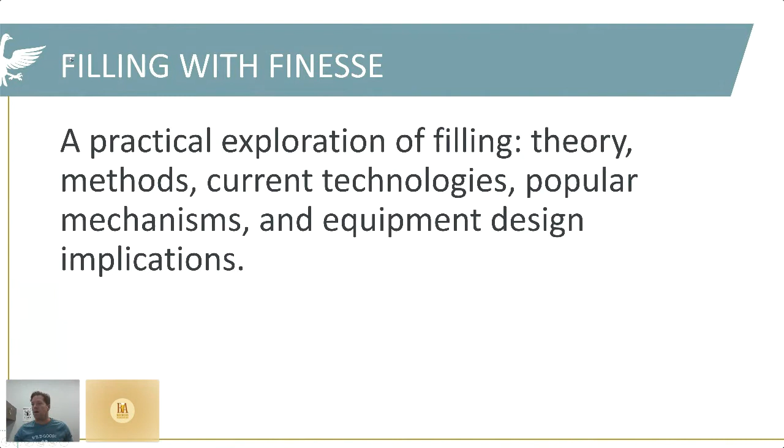So, without further ado, let's talk about this. We're calling this Filling with Finesse, a practical exploration of filling theory, methods, current technologies, popular mechanisms, and equipment design implications. Sorry, I got to move my monitor here. There we go. Now I can read what I wrote. Here's a quick overview of some of the stuff that we're going to talk about. There's some introduction, so who I am, mostly what the background is.

We're going to have to talk about some science and, hopefully, some fluid dynamics and stuff like that to really get the fundamentals down so we can understand why these things work. I'll go into some definitions of what this technology is, so when we're talking about it, or when you're talking about it in the future, we can all be on the same page and using the same words. And we will talk about some of the fill methodologies and some of the technology that's out there, what it means, how it works, and the pluses and minuses of what's there.

There are things that we're not going to cover. The first one is going to be DO and O2 pickup. Okay, I'll talk about it a little bit right now, but everybody says their filler is the best for DO pickup. This one's better than that one. And hopefully by the end of this you'll see that really it's not the mechanism, it's really how you're using it. And you can get great DO or terrible DO with any fill mechanism on the market.

Other things we will not talk about are politics, COVID, definitely not religion. Well, actually, there's a lot of things we're not going to talk about, obviously.

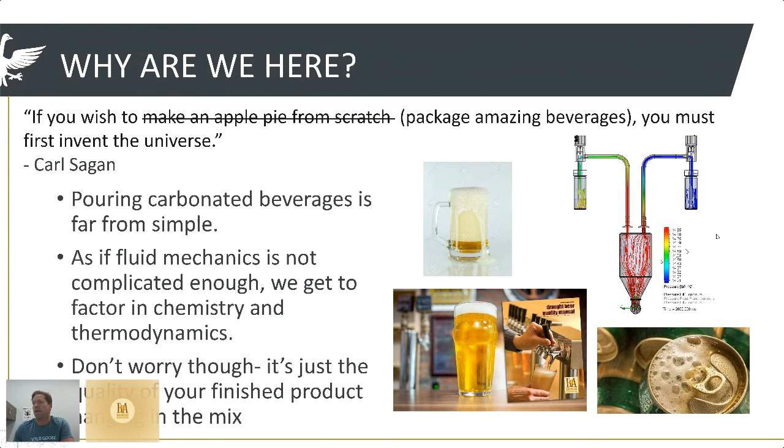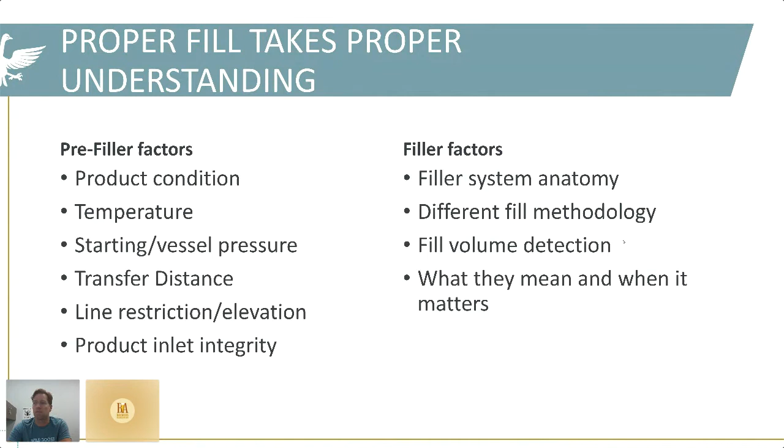And then there's the specific filler aspect of it, what does your fill system look like if you're evaluating different ones. We'll go into the anatomy of each of those and the different technology of how they work, how they fill, how they detect, and then why it really matters. So hopefully we'll be able to shed light on this and make what is a very complicated thing appear a little simpler by the end of it.

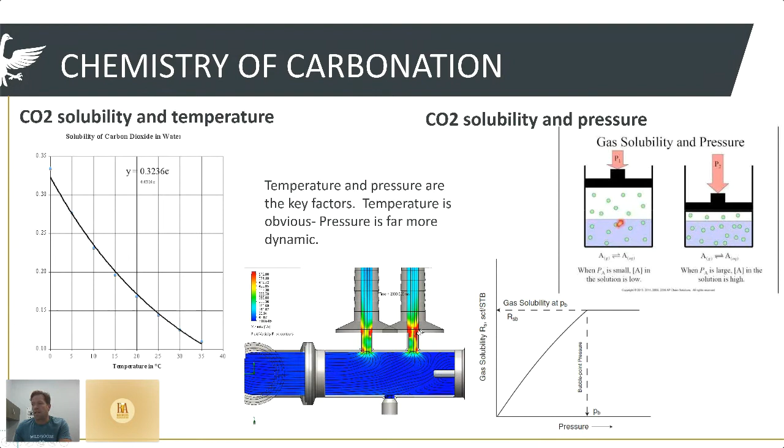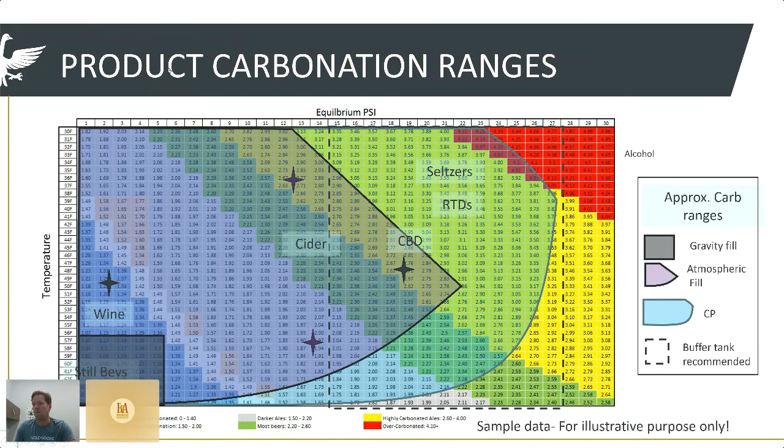So to go back into here, we want to look at all of these things. Our desired carbonation level really dictates what the head pressure on the whole system is going to be. So we call it 15 psi for round numbers. We have to have the vessel at 15 psi to say we want things carbed at 2.7 or 2.6 or whatever it is for our desired recipe, right? So the biggest trick here is controlling the pressure drop through the whole process, because remember that the pressure is a big part of the gas solubility.

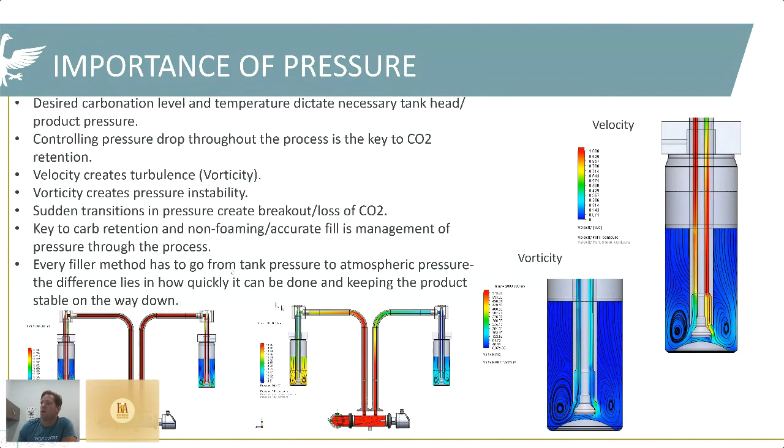So hopefully that lays a few of these things out. Oh, so here we go. So I got a little ahead of myself, but this illustrates it a little better. So here's the vorticity. You can see we have the velocity, basically as these things hit, and we see the swirls here. This is sort of the patterns and the fluid dynamics going on. We can see the velocity difference as it comes through the tube, going really fast to going really slow in here, and how the height of this matters. And we'll talk about that a little bit more.

But then it also translates very much to the way the pressure gradient in the whole system affects everything. So this one and this one are sort of the rough analogies, right? So this is the same plot. This one's pressure and this one's velocity down here. So you can sort of see that they're loosely related, or related enough to talk about it anyway. And they look pretty.

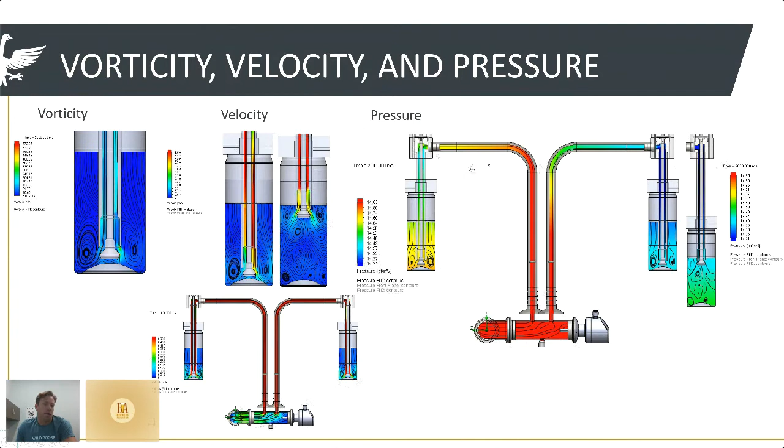Okay, so now that we are roughly in there, and I hope I didn't lose everybody, we're going to talk about a few of the different methods, the words that get tossed around and the methods that are used. So people seem to use gravity and atmospheric filling interchangeably. They are different. Gravity is a means of the liquid transferring from wherever it's being held and into the package by simply the force of gravity.

This is used very commonly in distilled spirits. It's used in the water in your tap room, for example, like when you have your jug sitting off in the other room for your customers to come up and fill their water. That igloo jug with the ice water in it and the solo cups next to it, that's a gravity filling system. Simple.

Obviously there's way more complicated ways to do it with accurate volumes and what have you, and automated and fast. But the method is using gravity to push liquid into another container, so it's great for water, for solvents, for distilled spirits. Most of those use it. Wine uses it frequently. Paint, whatever else we've got.

So atmospheric fillers, on the other hand, take liquid from a pressurized vessel and transfer it into a container that's open to the atmosphere. So I know I just said they all go to atmosphere eventually, and that's true. Atmospheric fillers don't have the vessel pressurized. So we take it from our pressurized beer tank, run down the line, and then into the container without applying anything, without sealing the container.

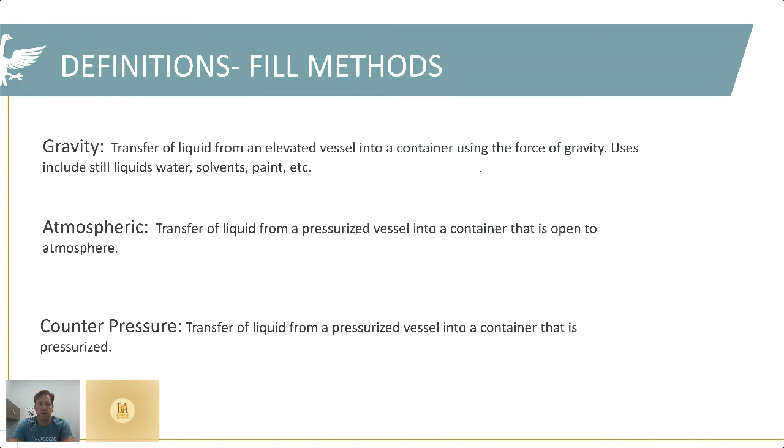And counter pressure, on the other end of it, is that same transfer process from a pressurized vessel into your container, but it actually seals the container and applies pressure to the top of that container so that you have more control over the pressure release in that regard. And we'll get to that. So anyway, I want to make sure we're all on the same page with these things. And hopefully that makes sense.

So this is a big slide. Forgive my rudimentary graphics here, but this is kind of a nice block diagram of the journey of your product from effectively your bright tank and into the filler. So let's walk through this here real quick. Up here we have the product tank, and we have our beer.

Let's call it beer. So in here, depending on how big this tank is, if this thing is a 3-barrel tank and it's 5 feet tall, the effective gravity on this isn't going to be huge. If you've got a 300-barrel tank and it's 60 feet tall, you're going to see a pretty big pressure difference from your first barrel to your last barrel. So that matters actually quite a bit.

The next one here is maintaining your pressure for your carbonation, and then you want to make sure you're maintaining your pressure all the way through all of this. So how much head pressure can you actually apply to your tank?

That's a thing. They all have PRVs. Most of them are set at 15 PSI. I personally have seen plenty of sketchy things happen with them where they get taped over because people need to be pushing at 18, or whatever it is. It's just another one of the factors here. Just knowing, is your tank pressure rated, is actually a legitimate question.

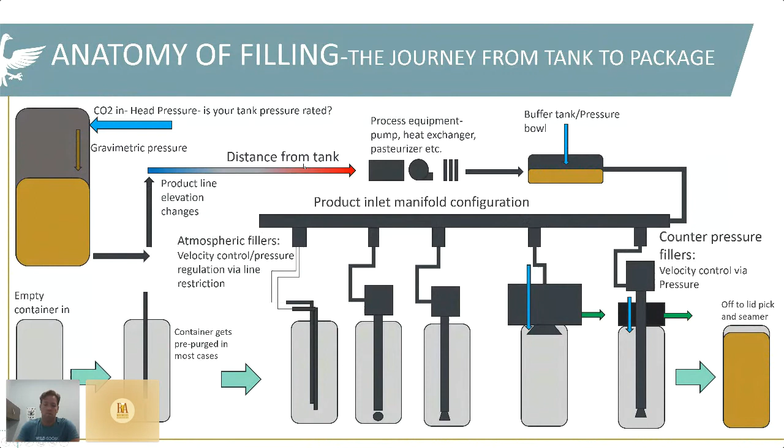In here, and here is a lot of it. Obviously doing this right is most of it, but they all play in, and I said I wasn't going to talk about that. So anyway, trying to think if there's anything else we need in here before we get going too far. No, I guess not. Okay, so let's talk about this first one.

Basically the simplest way to do this, and there are a lot of fillers out there that have this method, is almost like a draft system. You're taking a bunch of 3/16 beer tubing, running it effectively from the bottom of your tank and into your fill nozzles.

The nice thing is you get a nice even line restriction through this whole thing. Your pressure drop is really nice and consistent. The reason I've got this picture up is you've got a very consistent flow through here. And if this gets more restricted, that slows way down, and it's like your draft system. You don't have to mess with your draft system that much once you get it dialed in.

The biggest thing here is adjustability. And the other one to consider is what's happening right here. If you guys remember that slide at the very beginning where I had the manifold and the little tiny orifices at the top of it, showing how that diameter was really kicking up a lot of stuff, increasing velocities, dropping pressures. That is a very common spot where you're going to get a lot of breakout.

So the big point here is that if your product conditions are stable, if you're in the sweet spot of you're cold, you're not overcarbed, most of the time all of these little things don't make any difference. If your product is stable, the little changes in here are not going to screw you up. It's when you're trying to push warmer product at higher carb levels, long distances, that all of this stuff really starts to make a difference.

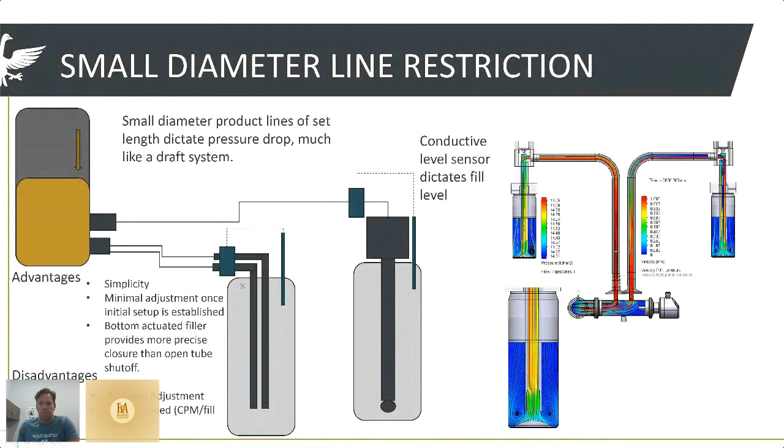Let's see. Feel like I covered that one reasonably well.

So the next one brings us to some form of restriction on the line. This is also showing sort of the same thing. We have a super high velocity here on an unrestricted line, and you see it red all the way through. I guess this is meters per second, so it's actually pretty significant. We're going from 0.5 meter a second to almost 0 as it hits, and you can imagine this pressure gradient in here is pretty significant. So in order to do that on a larger diameter line, you need to put some restriction in here.

So as you have your product tank, that makes this interface easier than the one previously, because you have a larger diameter here. You're not getting as much restriction. Your rates aren't as fast through there. You then come through, typically there's either a flow meter or timing on these systems. Your flow meter will tell you when it's done. I forgot my little dotted line. And then you go through some form of plate restriction here that is kind of a set and forget. I've seen this done a few different ways, flat plates, fancy valves, this kind of thing.

So the trick here is that this is a single mechanical simple adjustment. The nice thing here is it gives you more bandwidth. You can try and maintain optimal fill speeds. Let's be honest, nobody likes to sit in front of a canning line or a bottling line, right? We want to be done as fast as we can. So we really want to make sure we're getting the most speed that we can out of our fillers.

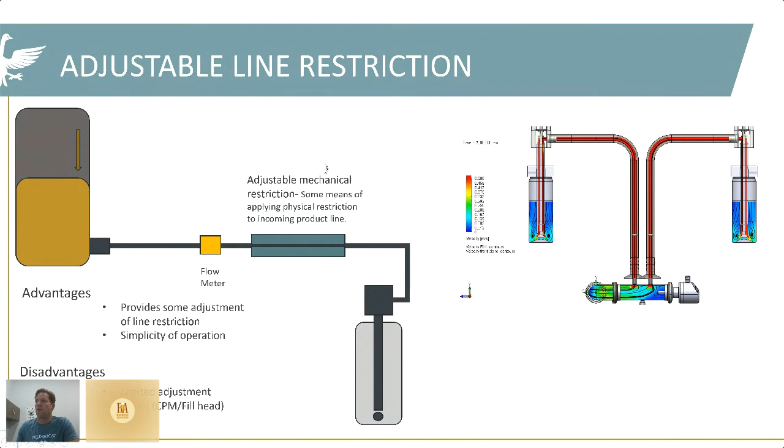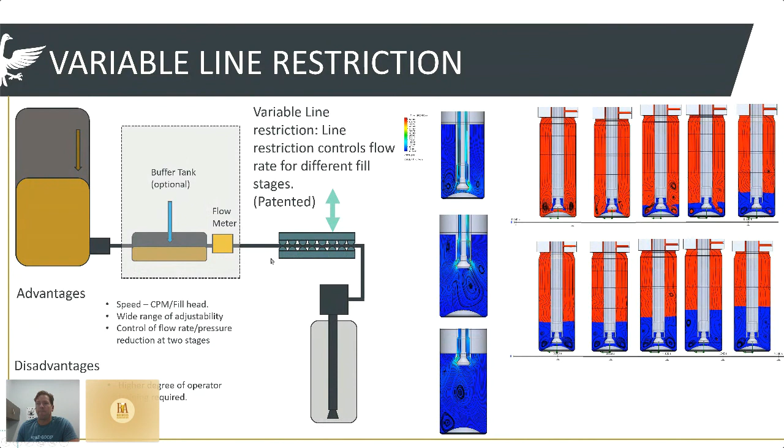You can see sometimes there's flow meters or sometimes there's sniff tubes to tell how full it is, but the general gist of this is the same. In the traditional implementation of counter-pressure, you have your tank, you're coming out of there, you're just maintaining pressure here, and you're actually pumping it out into a pressure bowl. So what happens in the pressure bowl is this will fill up to a certain degree, and then

you'll apply extra pressure. A lot of these operate at 30, 40 psi, so it's very highly pressurized in here, and you're stepping way up, and then you're pressurizing the vessel to slightly less than what is in the pressure bowl. The difference between the pressure bowl and the pressure in the vessel is what controls your flow rate. So the filling part can actually happen pretty fast.

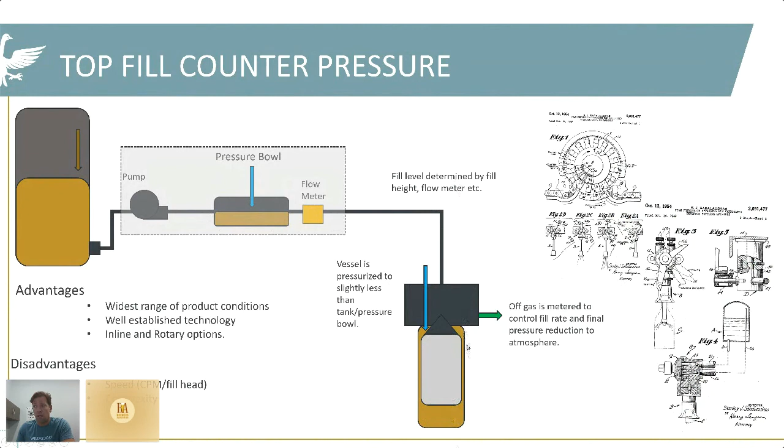In this, you can do that, and you kind of have to make sure you're always pressurizing this can, especially if you're coming in here at 30 or 40 PSI. This has to be pressurized, which takes time and uses a ton of CO2, whereas now you have the option of controlling what that top pressure needs to be. So it doesn't have to be every can pressurized to 35 PSI, taking the time, the gas, and the consumables to do that.

Instead, you have control over how much you need. If you don't need any at all, you don't bother. In other instances where you do need counter pressure on the top of it, you can apply as needed and vent as needed. And the whole process is much quicker and uses much less CO2. So that's sort of where we're at with how it works.

And of course, the advantages, I'm trying to be brief here. The lists of advantages and disadvantages of all these systems are way longer on all these slides. Advantages here are we have the cool parts of the fill system in our atmospheric system, in combination with counter pressure. The disadvantages all come with it, right? You still have to adjust things. You still have to know what you're doing, and all of that.

And we're hoping we're going to be launching. It's going to be available in January. There's been a lot of testing. We've been working on it for almost 2 years now. And it's looking really promising, and we will have units available in the beginning of January.

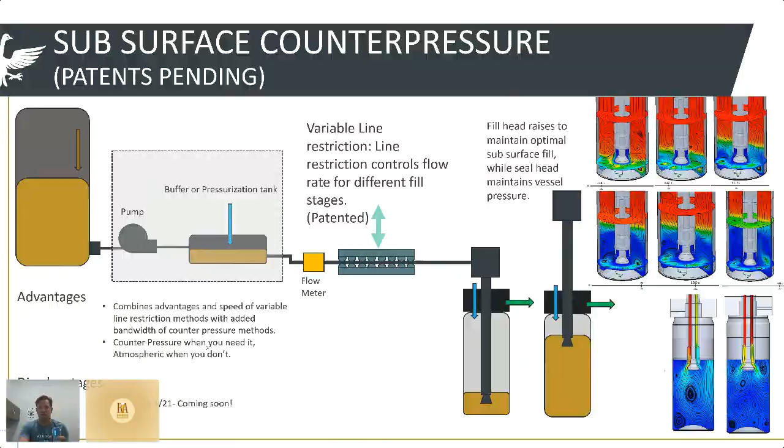So now, who thinks this is ready yet? You think it's sat long enough to be opened? Let's find out. Because now we get the questions. There we go. Solubility takes time.

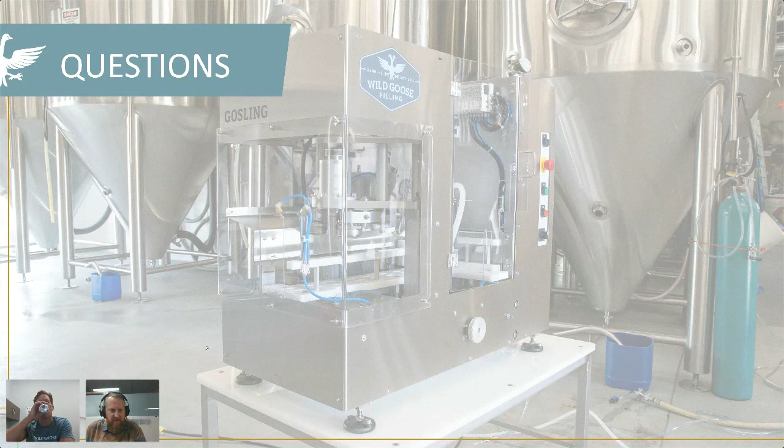Next up comes from Scott. He wants to know, how does the counter filler compare in price and cans per minute to the Evo series? It should be pretty comparable. It's going to be a little more expensive. We have not pinned down 100% of the bill of materials on things yet. So it'll be comparable. Likely it'll be a little more expensive, and part of it will be, again, throughputs.

We don't have enough of them in the wild to give a really firm number on it. We can always do lab testing, but we're not going to give you a throughput number based on what we pour with water in ideal conditions. We want to get more of them out into test facilities and really see what's practical before we start quoting throughput numbers.

Okay. Will the new system coming out in January be available for bottle filling, or is this purely a canning only system? This will be a canning only system. We have a lovely counter pressure bottling system. If you want bottling, we can do that all day long, and we can get you one way before January.

All right. Wondering about headspace and contamination when canning carbonated water. Okay. So yeah, water, the nice thing about alcohol is that it kills all the bugs. You need to be careful with a lot of things with carbonated water.